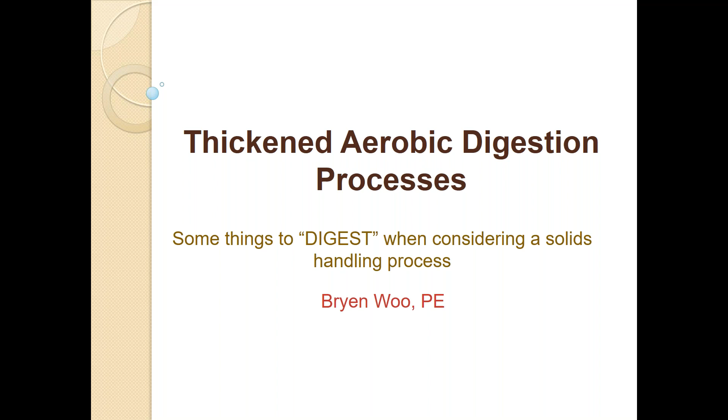So why should you really care about managing your biosolids? Why should you care about aerobic digestion? Well, the answer is that we're only growing as a society, and unless we magically forget how to go to the bathroom, we're only going to generate more wastewater.

To give you an idea here, we have about 15,000 POTWs in the US that treat about 30 billion gallons per day of wastewater. And with that, for every MGD, we produce 1 dry ton of solids. So that's a lot of solids that we're producing from our wastewater. Finding ways to manage the biosolids in the most efficient and cost-effective manner is very, very critical.

Because if you think about it, sludge treatment accounts for more than 30% of the O&M costs. Generally in the US, I think it's much higher, around 40 to 50%. And about 45% of the POTWs utilize aerobic digestion.

So I think it's important to clarify where it's ideal to use an aerobic digestion process, like what size of plant. A good guideline from our experience is that aerobic digestion is going to be utilized for plants that are 5 MGD or less. Of course, that is highly dependent on energy costs. If you have high energy costs, and I'm talking about maybe 10 cents a kilowatt hour or more, that 5 MGD might get reduced down to 4 MGD where aerobic makes sense. And if you have lower energy costs, then that 5 MGD might get stretched out to 8 MGD.

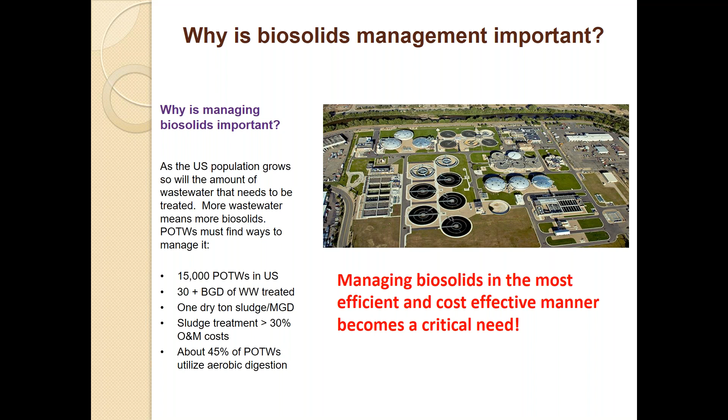So as you can see, most of the solids that are treated in the US, the majority of it is treated with aerobic digestion. So why is it important to really optimize aerobic digestion, and why treat it a little differently than just a tank full of diffusers? Because if it's not managed properly, it could be an expensive one.

And some common client concerns related to the management of biosolids, and with aerobic digestion it's no different. So you have increased solids disposal costs. If you don't stabilize the solids or have a plan to dispose of the solids, you can pay a lot in disposal costs.

One of the disadvantages about aerobic digestion is high energy costs in general. Although it is simple, you're going to spend a high amount of money on energy due to the aeration of the tanks.

Depending on what type of treatment goals you have, footprint or capacity can be a concern. One of the challenges I do like about wastewater is that limits are only going to get tighter and tighter.

I don't know if in New York, although you guys are pretty close to the Chesapeake Bay, you have some of the issues with algae growing there, so you have to control the amount of nutrients discharged to the Chesapeake Bay. There are certainly concerns with returning too much nitrogen and phosphorus back to the head of the plant, depending on what biosolids management system you have.

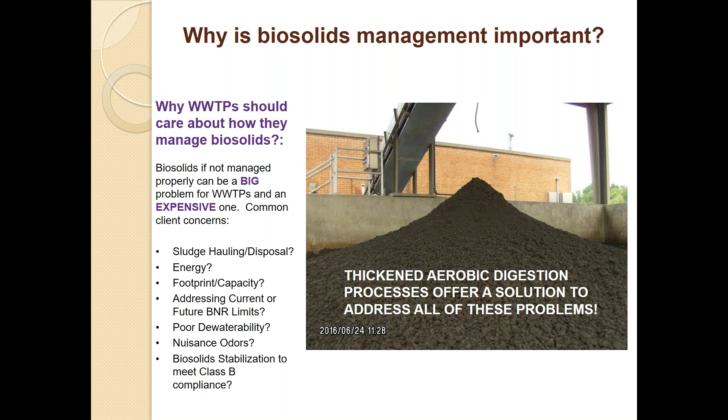So Class B stabilization, where you have a land application option, might be a very good option for clients to consider. Thickened aerobic digestion, we've really optimized the systems to offer a solution to address all of these concerns. So the first poll question of the day.

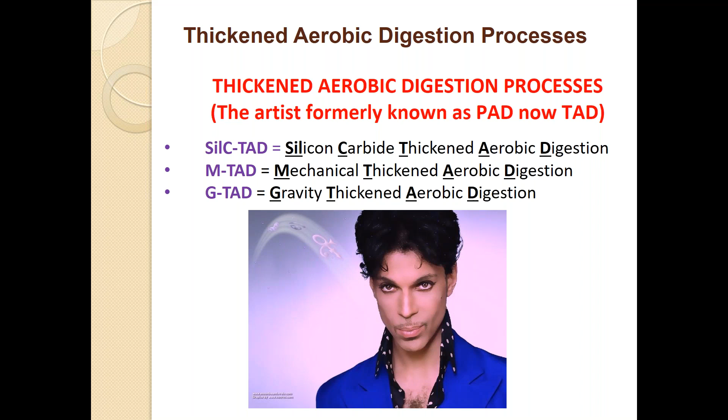So why would you want to use a TAD system, other than the process optimization techniques I described? One reason is that they feature Class B stabilization in a reduced volume. If you compare thickening versus not thickening, you're really reducing the volume and footprint required to meet Class B stabilization. For instance, if you waste your solids at 1% and thicken to say 3%, now you're talking about reducing your volume by a factor of 3 to achieve Class B stabilization.

Since you have reduced tank sizes, now you reduce your energy as well, because when you size aerobic digestion, particularly for mixing, you're sizing it based on 30 SCFM per 1,000 cubic feet just to mix the tank. So if you reduce the size and the volume of the tank, you also reduce your air requirements.

Also, these systems are ideal for retrofits. So if you have some tanks at your plant, or if your plant is up against it capacity-wise, by thickening, you increase the capacity of those tanks. So you may not need any additional infrastructure to meet Class B stabilization. And particularly for a retrofit, if you have longer digestion time, if you have longer capacity in your tanks, you get better digestion and reduced disposal costs.

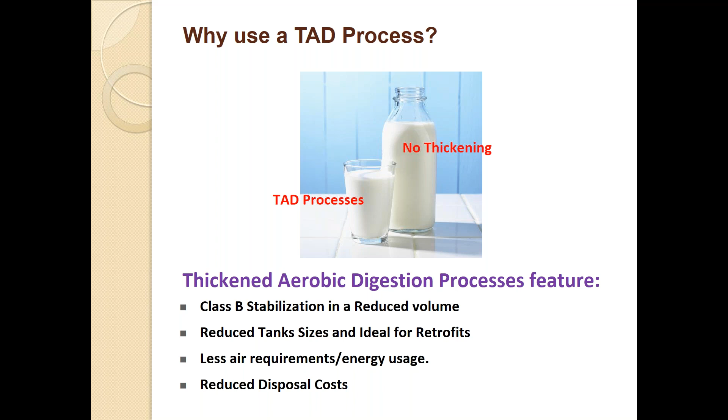I'm going to present some case studies where we have shown examples of where we've retrofitted thickening into aerobic digestion, how we've shown reduced disposal by increasing the capacity of existing tanks. So the first process is a gravity thickened aerobic digestion process, and it's very simple.

A lot of operators know how gravity thickeners work. The most that you can thicken to is 2%, and that's because you're really relying on the settling characteristics of the sludge. So if you have a good settling sludge, the more you're going to be able to thicken with a gravity thickener. But from our experience, the most that you can get thickening wise with a gravity thickener for WAS only is about 2%.

So how it works is that you have waste activated sludge go into a premix, then it goes into a gravity thickener where the sludge settles to the bottom, and then you pump the scum and the thickened sludge that's collected at the bottom of the thickener into aerobic digester number 1. So in aerobic digester number 1 you basically get a VSR and aeration, and then you loop it back with the premix tank. So you have a continuous looping cycle between the premix tank, the gravity thickener, and aerobic digester number 1.

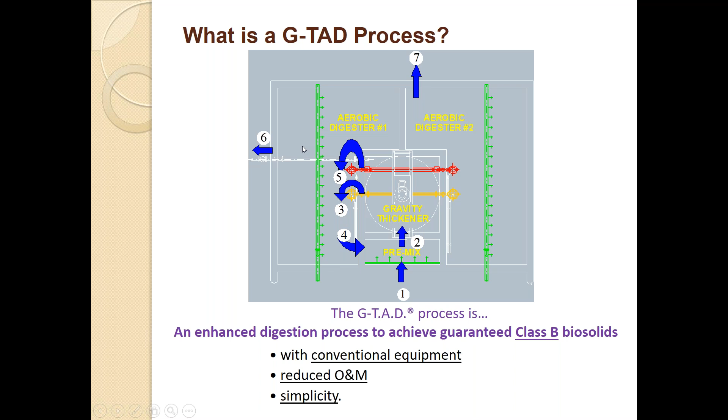Aerobic digester number 2 does not receive any incoming sludge. It's isolated from the process. So it just basically sits there and aerates. So half the time for the SRT required for Class B is how long you operate digester number 1 in loop. And after the half amount of the time is over, then you basically draw down aerobic digester number 2 and send the sludge to wherever you want to take it. Typically it's dewatering. And then aerobic digester number 2 becomes the in-loop digester. So it switches functions with aerobic digester number 1, which becomes the isolation digester. So that's how the GTAD process works.

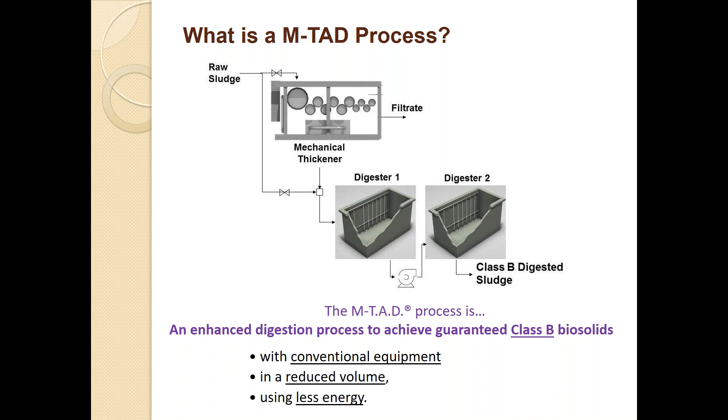The next is the mechanical thickened aerobic digestion process. And this is a very, very straightforward process. So you're using polymers to thicken the sludge up to 4%. And this is a really good application if you're looking to convert an anaerobic digester to an aerobic digester, because most anaerobic digesters have some form of mechanical thickening equipment. And then you just basically place it into multiple digesters that can operate in series or parallel. So, again, you get reduced volume, less energy, and you're using conventional equipment that operators know how to operate.

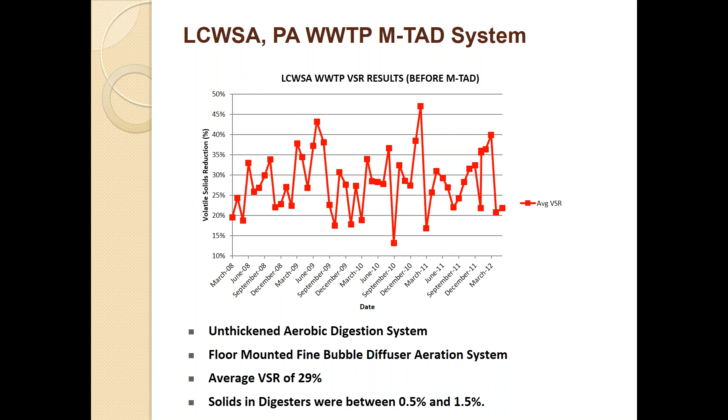So just to give you guys an idea of how the process optimization works when you employ thickening, but also implement some form of temperature control and have better aeration, let's look at a facility that has an MTAD system. So this is the Lycoming County Water and Sewer Authority in Pennsylvania. Before they implemented the MTAD system, they had a floor-mounted diffuser system, unthickened aerobic digester, and the tanks were uncovered. As you can see, they didn't really get very good VSR. On average, it was 29% over a 3-year period. And the solids in the digesters really weren't thick at all. They were only between 0.5 and 1.5%.

So with the MTAD system, we covered the aerobic digesters to improve the VSR in the winter, because in winter operation, if it gets too cold, the biological activity of the system is severely hindered, particularly when the temperatures get lower than 15 degrees C. So we covered the digesters and we thickened up to 4 to 5% with the GBT. And this gave the plant or the digesters enough capacity to get Class B stabilization.

And as you can see, you have very, very good VSR. It's generally between 40 and 70%. And we used our coarse bubble diffuser system. So it really depends on the diffuser system as well. And I'll discuss that in a little bit more detail when we get to that part of the discussion.

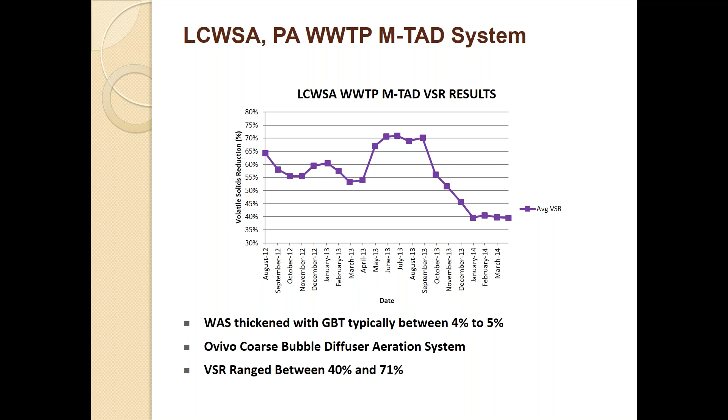But you can see that when you increase the capacity as well as improve the temperature, you get better VSR. And with better VSR, you see the differences in the solid reduction. So we fed at 5, we digested out of digester number 1 at 3%, and digester number 2, I think we got maybe an additional 0.5% solids reduction. And you see the differences in the solids reduction compared to the system prior to this.

So we were able to reduce the disposal by about 50%. And that gave them a solids disposal savings of about $37,000 a year. So you see the differences in the solids disposal when you really increase the capacity of the system, as well as provide improved digestion during the winter.

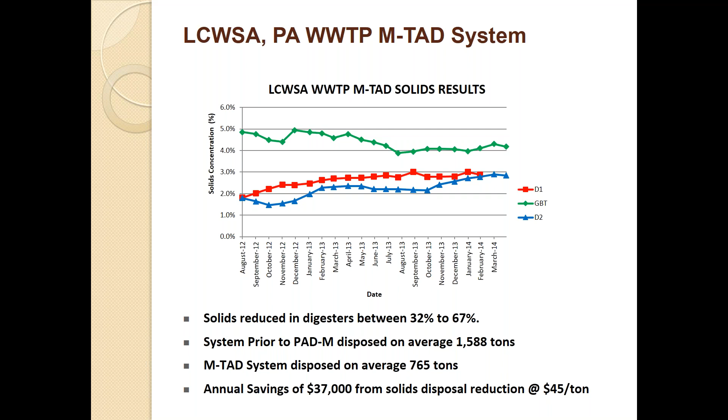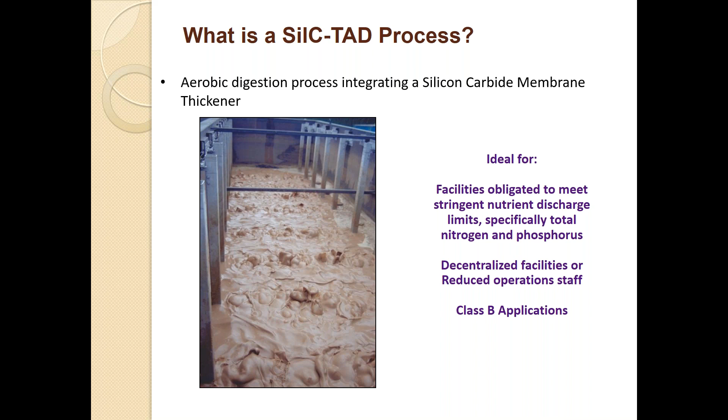So the next one might be a little bit of a new process for people. It's the SilC-TAD system, and we use a membrane thickener, silicon carbide membrane, for aerobic digestion. And the applications for this are facilities to meet stringent nitrogen and phosphorus limits. So more info on that as we progress later on in the presentations. It's ideal for decentralized facilities with reduced operator staff and Class B applications.

So before we go, oh, sorry, Wendy. No, that's okay. I will launch the second question here. Hold on.

Which of the following are reasons to use a TAD system? And you've got choices A through E, and be sure to hit submit afterwards. Looks like we've got about 75% have voted. We'll give it another few seconds. A few more votes coming in.

Okay, I'm going to close this poll. And I'm going to share the results. 93% of you picked E, and that is the correct answer. It's B, C, and D. Obviously, we're not going to get Class A stabilization. We've been talking primarily about Class B. And with that, Brian, we'll go back. Thank you, Wendy. Sure.

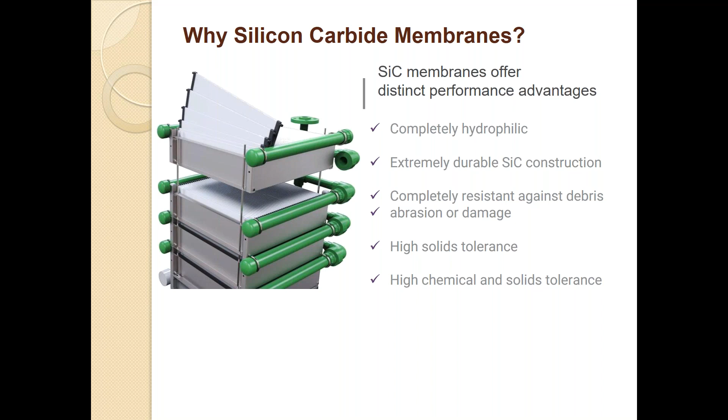With membrane thickening, probably the most important advantage is that it's extremely durable. SiC is the second hardest material on Earth. There's only one material that's harder than SiC, and for all you ladies that are engaged or married, you might be wearing this material on your finger. And the only material that has higher hardness properties than SiC is a diamond. It's completely resistant against debris or abrasion or damage related to those type of damage. It has pretty high chemical and solids tolerance as well.

So how does a membrane work? How does sludge get thickened with a membrane? So basically there's a diffuser that provides air scour for the membrane. So one of the purposes of the scouring air, or the diffuser, is to make sure that the surface of the membrane is cleaned. If you have sludge or solids that completely block the membrane plate, you're basically just taking away the functionality of the membrane. You're not going to be able to really filter any water out of the membrane. So one of the key purposes of the scourer or the diffuser is to clean the membrane.

The other is to create a vacuum in between the plates, which allows the water to be filtered out of the membranes. And that's how the sludge ultimately gets thickened. So the water that's filtered out of the membrane, it's collected through some series of pipes here.

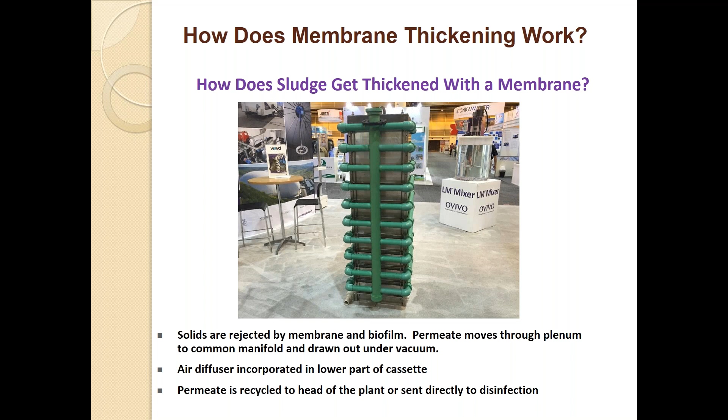And this pipe is connected to a low suction pump that extracts the water that's filtered out of the membranes. And more on this later, the water that's filtered out of the membranes is high quality, reuse quality water.

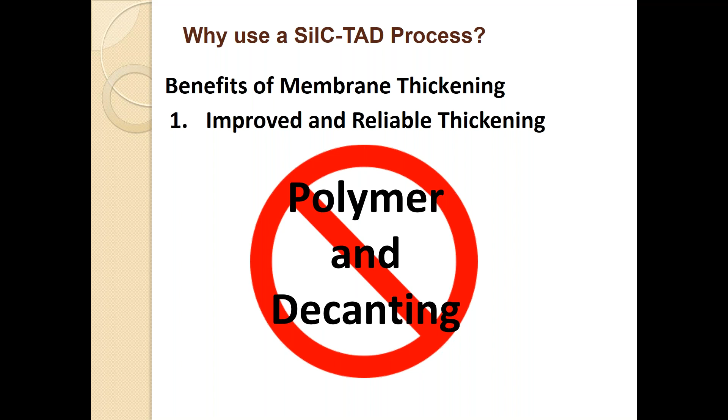So the benefits of membrane thickening is you have improved thickening. And what I mean by improved is when you decant, which is a common operation in aerobic digestion, the most from our experience that you can get is 2%. And it's inconsistent because you're relying on the settling characteristics of the sludge. With this system, you're thickening up to 3% solids, and it's very, very reliable and very consistent. The other is that you don't require any polymers to thicken. So since you don't have any polymers, you have less O&M associated to thickening.

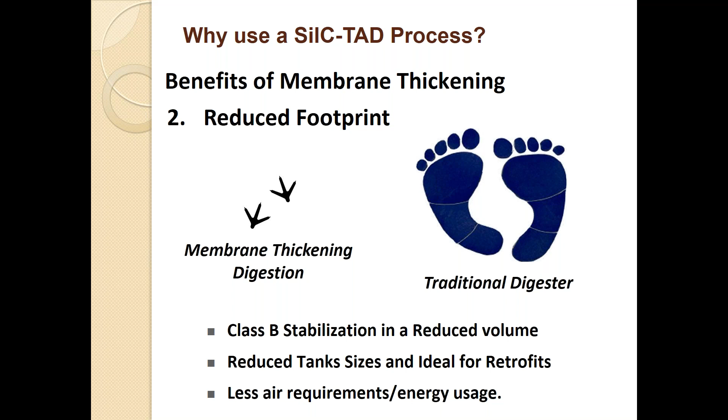So with really any of the TAD systems, the SilC-TAD is no different. You basically have reduced footprint of the membranes because you're thickening the sludge. So you get Class B stabilization in a reduced volume, reduced tank sizes, ideal for retrofits. And because of the reduced tank sizes, you have less air requirements and energy usage. And probably the most unique advantage of the membrane thickening system is it produces a high quality permeate. And the permeate is the water that's filtered out of the membranes.

And that clear glass of drinking water is the type of quality of water that you expect to be filtered out of the membranes. So when we talk about why this system is ideal for BNR applications, the reason is because this water contains very low amounts of nitrogen and phosphorus. And because it's reuse quality and because it has very low amounts of nitrogen and phosphorus, it gives you some options and some operational flexibility.

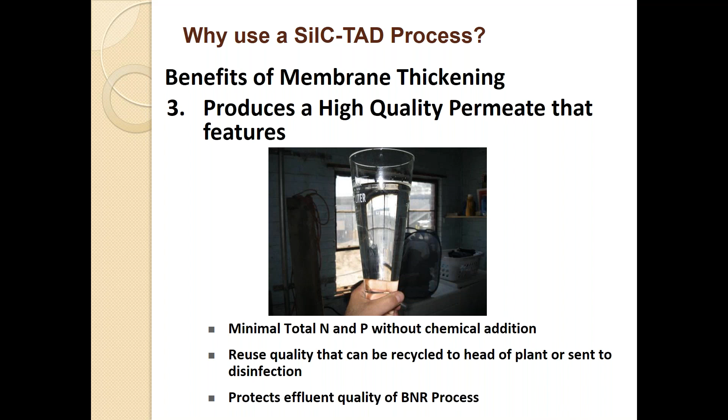So first is that certainly you can take it to the front of the plant for sure, but you can also combine it with your effluent, because we learned in engineering school the key to pollution, the solution to pollution is dilution. And you also can consider sending this to disinfection as well. And keep in mind that the treatment and the very low nitrogen and phosphorus in the permeate, it's all managed biologically. There's no chemical addition required. It's also an economical solution if you're evaluating it over the life of a wastewater treatment plant.

So let's take the Fruitland wastewater treatment plant as an example. So some background on the Fruitland wastewater treatment plant is that it was a 0.8 MGD SBR. They were upgrading the SBR to do ENR, enhanced nutrient removal. And they had 2 conventional aerobic digesters. And these digesters did not provide enough capacity for Class B stabilization. So the consulting engineer for this facility had to consider some thickening alternatives to optimize and make best use of the existing infrastructure. So they were considering gravity thickening, mechanical thickening, and membrane thickening aerobic digestion.

So what I find very interesting about this evaluation is not that the membrane thickening process had the highest capital costs, but really how even it is. It's not much more expensive than mechanical or gravity thickened aerobic digestion. So why is that? The reason why is because the mechanical thickener required a building, and buildings can be very expensive to house a mechanical thickener. With gravity thickening, because you're only able to thicken to 2%, they had to build an additional digester to achieve Class B, whereas membrane thickening required the least amount of infrastructure, just an anoxic basin and a membrane thickening basin.

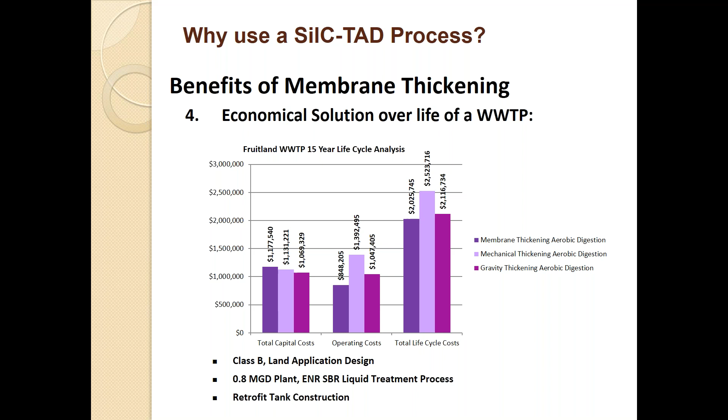The reason why we screen it is to protect the integrity of the membranes. So the WAS goes into an anoxic basin, mixed with a submersible mixer. Then it goes into a membrane thickening basin where the permeate goes to wherever you want to take it, and the thickened solids get left in the membrane thickening basin.

It overflows into the in-loop digester, where you get the majority of all the solids reduction, but also the nitrification to occur. Then it overflows back to the anoxic basin. So you get a continuous looping cycle between the anoxic basin, the membrane thickening basin, and the in-loop digester.

This looping cycle is the key to why we're able to have very low nitrogen and phosphorus in the water that's filtered out of the membranes. First, you have nitrified sludge going into the anoxic basin, so you get full nitrification-denitrification, and then your carbon source comes from your WAS, so you get the denitrification. That's how we're able to get total nitrogen removal. The phosphorus is managed because the membrane thickening basin is continuously aerated.

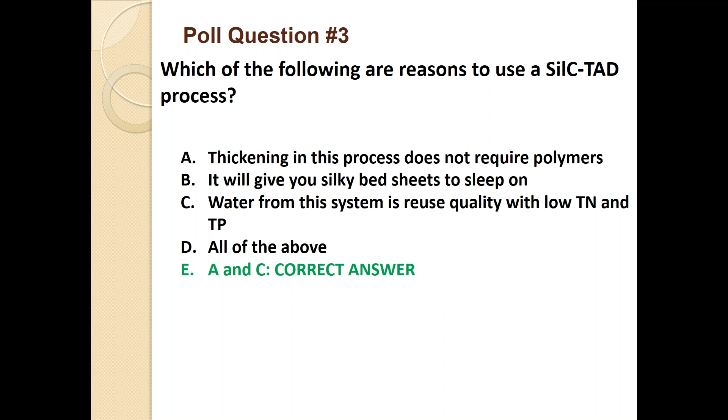So with thickened aerobic digestion, obviously I discussed a lot of the great advantages to thickening. However, there could be challenges if all the challenges with thickening are not considered. One of the key challenges is that you have to have the right aeration system for a thickened aerobic digestion process. You cannot just put in a fine bubble diffuser, because if you do, you can have quite a few challenges if you don't have the correct aeration system.

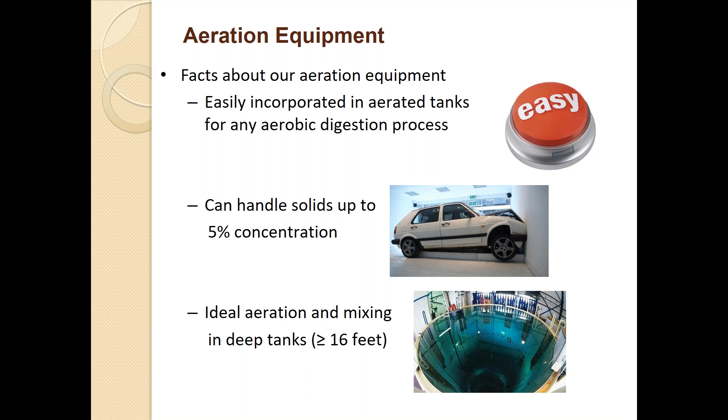Some of the challenges could be: you could clog the diffusers, you won't get good mixing in your digester, and you'll have a lack of oxygen transfer efficiency. If you don't get the right OTE, the performance of your process may be hindered. So obviously you need the right aeration equipment with an aerobic digestion system. We have a lot of experience with thickened aerobic digestion, and I think a lot of it has to do with the fact that we have the perfect diffuser for a thickened aerobic digestion application - the single drop diffuser.

If you had a cup of water and you put a straw in it, raised it about 1 millimeter off the bottom of the cup, and blew air into it, that's basically how the diffuser works.

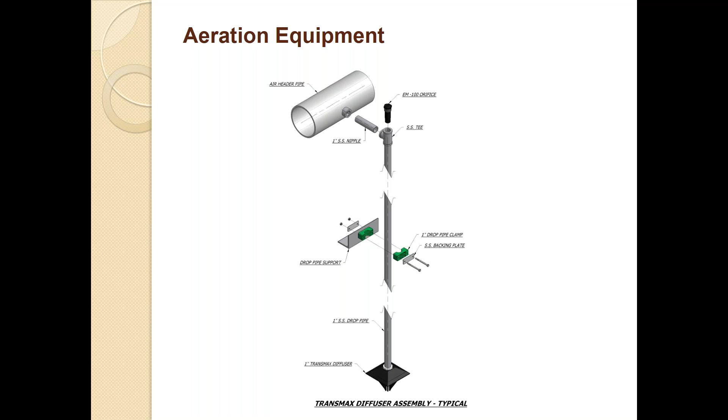One of the key advantages of this diffuser is that the orifice is completely accessible. It's not submerged in the liquid level, and the orifice is the only part of the diffuser that requires access in order to maintain it.

The diffuser alone is mainly a non-clog diffuser, but in the rare event that it does clog, all you have to do is unscrew the orifice cap shown in the picture on the right, stick a rod or pressure hose down the drop pipe, and get the clog out. It's like cleaning a gun for some of you gun enthusiasts out there.

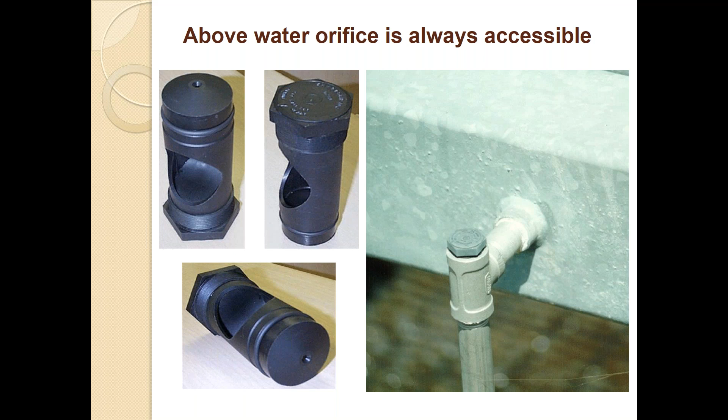One advantage is that because you can access the orifice, you don't have to drain the tanks or take them out of service. With a floor mounted diffuser system, if it clogs, the operator has to go into the tank, drain it, and clean the diffusers. Obviously it's not a fun chore, and this design completely eliminates having to do that.

The single drop diffuser alone can aerate solids up to 3%, but if you wanted to mix very thick solids, you would add either a shear tube or a draft tube to the single drop diffuser.

Both function basically as an airlift pump. You're pumping sludge from the bottom of the basin up to the top of the tube, getting this airlift pumping action, which increases the velocity of the mixing. That's how you're able to mix very high solids.

The shear tube is a single tube that goes around one single drop diffuser, whereas a draft tube is a bigger tube with multiple diffusers inside of it.

Also, one advantage is that the diffuser discharge point is actually halfway into the tube, so it's not submerged all the way down to the bottom of the floor. That reduces the discharge pressure requirement for your blower system.

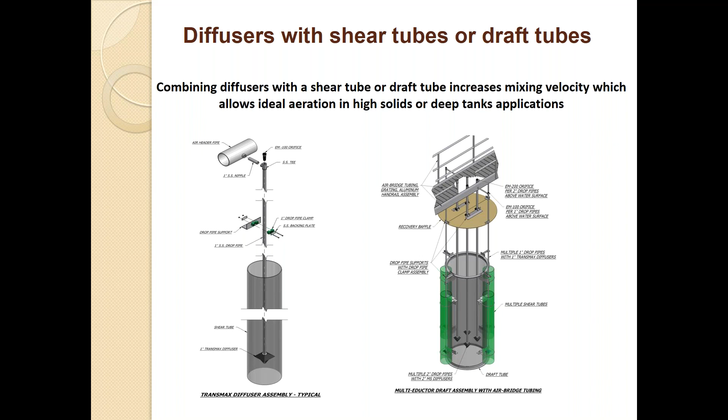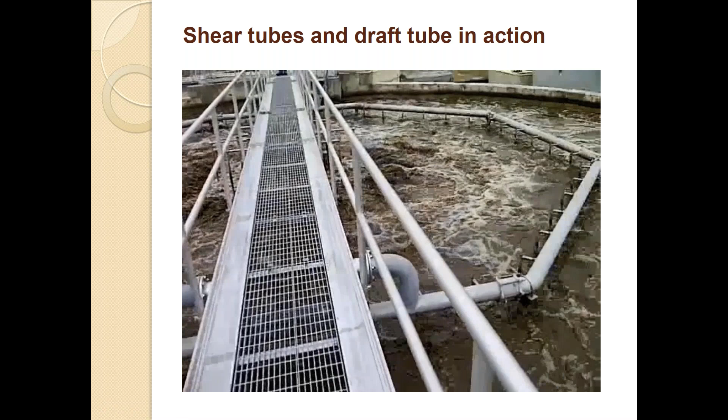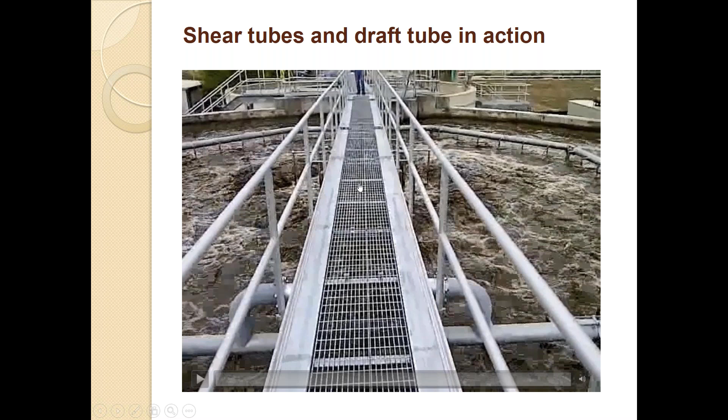This is what the aeration of the system looks like. The center portion of the tank is being mixed with a multi-eductor draft tube, and the outside of the tank is being mixed with the shear tube aeration. As you can see, you get very powerful mixing with this diffuser system.

We also have an option where we integrate a flat panel aluminum cover. As we know, temperature control matters, particularly when it's cold, and it does get cold in most of the part where most people in this audience are from, which is the East Coast. The cover really optimizes VSR in the wintertime.

Not only do you have issues with lack of VSR if the temperature gets too cold, but you also have ammonia accumulation that can occur because nitrifying bacteria activity is severely hindered when the temperature is below 15 degrees C. This cover system really provides a good solution to manage the temperature when it gets too cold.

The cover system, we call it an air beam cover, uses the support beams as air channels to provide air to the single drop diffuser system. We integrate all the diffuser systems I just showed you, whether it be the single drop, the draft tube, or the shear tubes, with this cover system.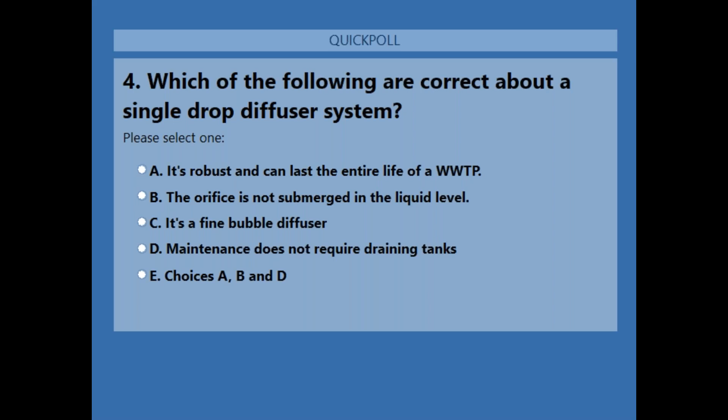Looks like we have some pretty quick voting by the majority of you. Must be an easy question. We'll give it a few more seconds. Okay, it looks like the majority of you have voted, and the right answer is, sorry, I'll share that. E, choices A, B, and D, and 91% of you got that right, so good job.

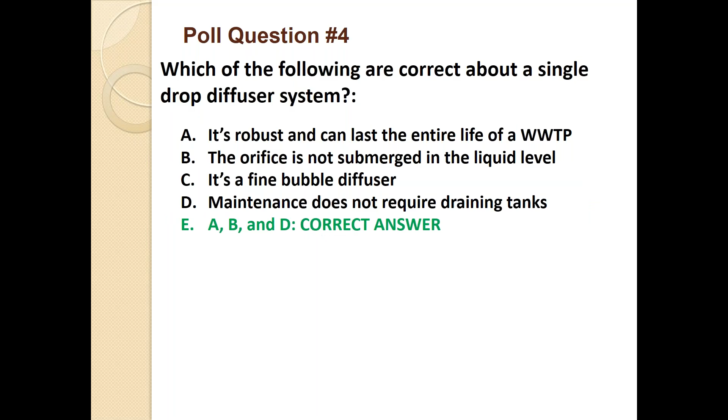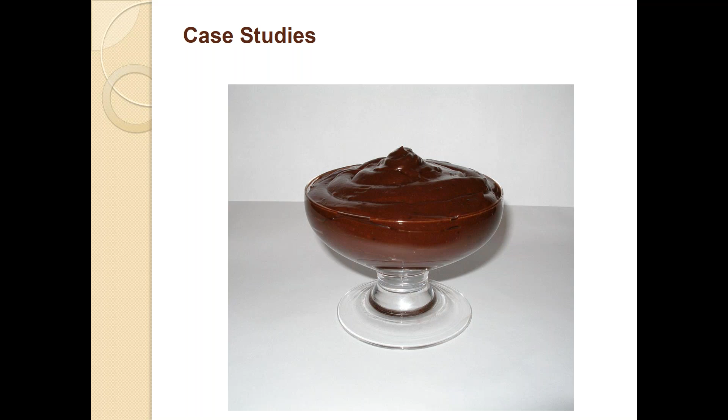So now we move into case studies where we've collected data from several facilities that operate the diffuser system along with the TAD process. So they say the proof is in the pudding, and I find it ironic I talk about sludge and it looks a little bit like pudding. So the first one I want to talk about is Frackville, Pennsylvania.

With Frackville, they had aerobic digesters that were not covered, and their belt press was pretty close to capacity. So the operators felt that the solution was to increase the size of the belt press to handle or dewater their solids. But the engineer had an idea with their experience with Ovivo's aerobic digestion systems. The belt press was a good piece of equipment still. It was in good shape.

Maybe there was another way to optimize their solids process besides increasing the size of their belt press or getting a new belt press. One of the ideas they had is, okay, you have these open top covers, you stabilize the sludge by adding lime. So maybe we can get rid of having to add the lime and provide improved digestion and send less solids to the press. And by sending less solids to the press to process, maybe that would prevent the plant from having to buy another belt press. So that's the direction that the engineer went with: they invested the money on improving the digestion instead of buying a new belt press.

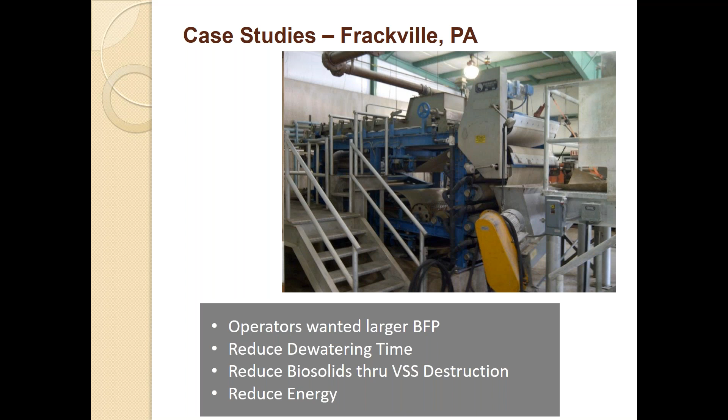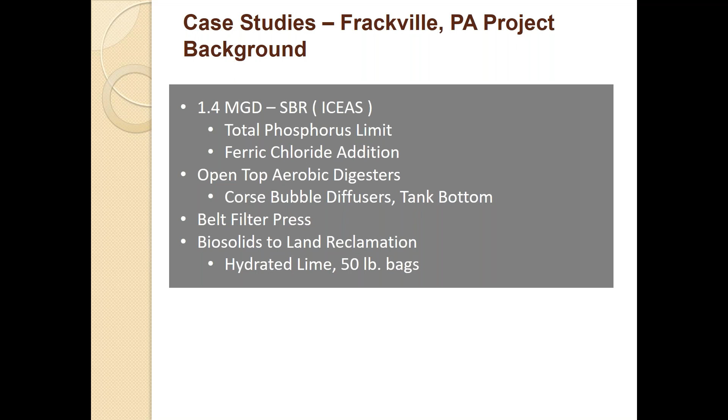And some history on this is that, again, their aerobic digesters were not covered. They had floor-mounted coarse bubble diffusers. They added lime to stabilize because they weren't getting the VSR required to meet Class B. And they were also adding ferric to control the phosphorus. Now, we didn't implement any type of thickening. What we did is that we added the air beam covers to improve the temperature and hence improve the volatile solids reduction. And that's basically what we did here.

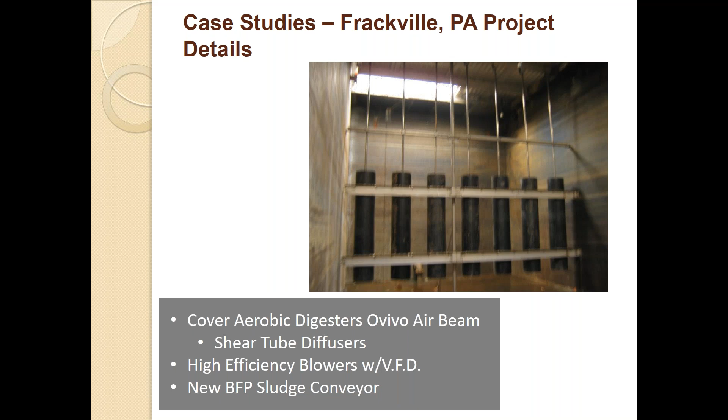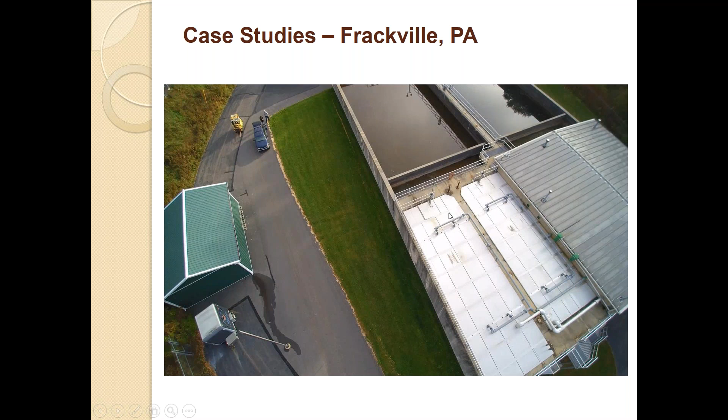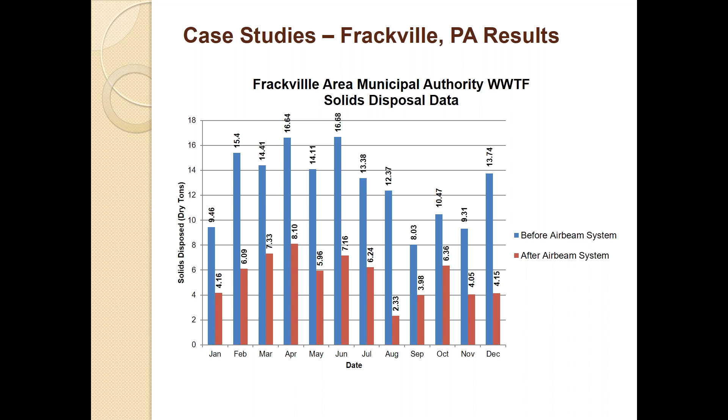So we have the cover and the single drop diffusers with shear tubes to improve the temperature and the VSR. And this is what you see here. This is what the covers look like at Frackville. And then you see the SBR tanks. And then this is what we meant by the goal of the system to reduce the solids being sent to the belt press. You can see before the air beam system and comparing it after the air beam system was implemented, the amount of solids that were reduced as a result of improving the digestion by just simply covering the tank and providing a better diffuser system.

They realized some savings, a 57% reduction in solids. That was only about a $17,000 annual savings. They were able to get an energy rebate from Pennsylvania Power and Light, which is their energy provider, and they showed a substantial amount of energy savings as a result of using our system. Remember, with the shear tube system, the diffusers are not submerged to the bottom of the floor, and that reduced the operating horsepower on their blowers.

Other benefits were that they didn't need any lime for land application. We were able to get a Class B stabilized product. And because of the improved digestion and implementing aerobic and anaerobic cycling, they were able to minimize the amount of P going back to the head of the plant. So they eliminated adding ferric for P removal.

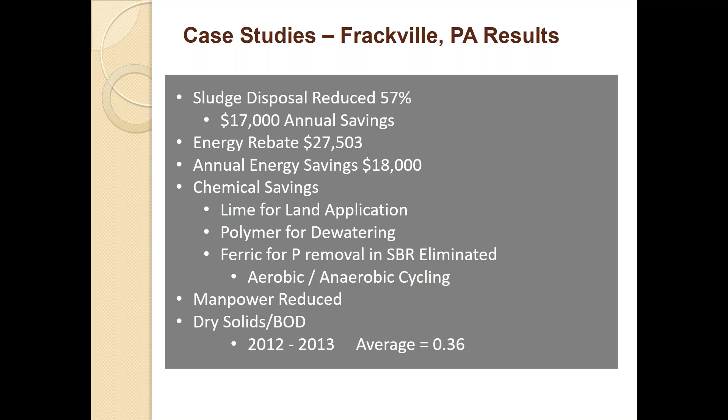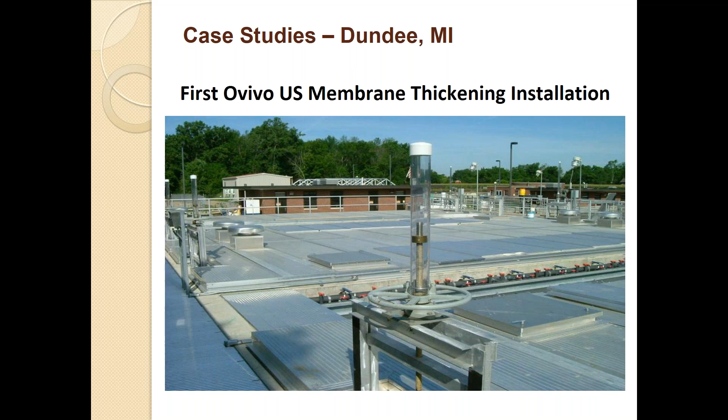So now we'll go into the membrane thickening, and the first one I want to talk about is Dundee, Michigan, which was the very first US installation. Some history on this is that the way they dispose of their solids at this facility is they land apply it, and they subsurface inject it. If you have too much snow on the ground, it could be very challenging to subsurface inject the solids onto the ground. So they basically had to limit their solids disposal to 2 times per year, once before the snow hit and once after the snow hits.

What happened before is they had a conventional aerobic digester. They only thickened to 2%, and they only got 120 days of SRT. They needed 180 days of SRT, again, to limit the times that they disposed the solids. And all Ovivo did was add in the membrane thickening basin, thickened to 3%, and they were able to get the required holding time so that they only dispose the solids twice per year.

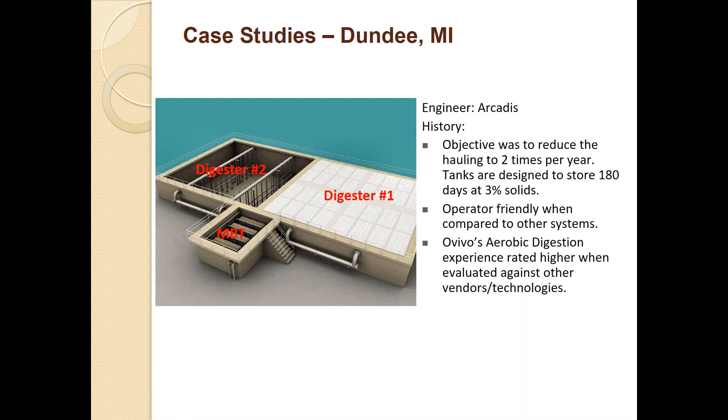And I mentioned one of the advantages of the membrane thickening system is that you get very good water quality that's filtered out of the membranes. And you can see here that you basically have non-detects on both the ammonia and nitrates, and the phosphorus is just a little over 1. And that was 1.5 years worth of data.

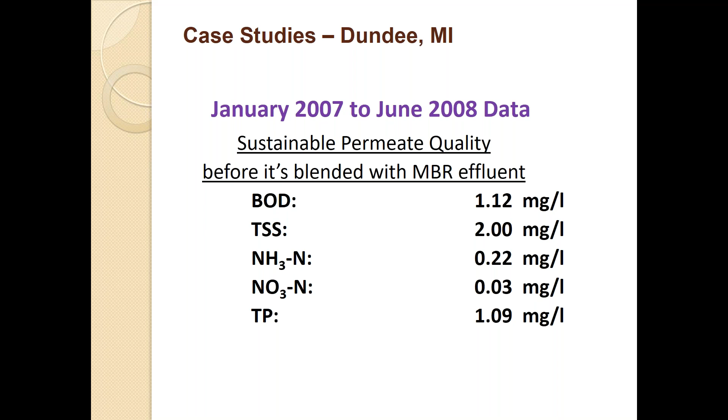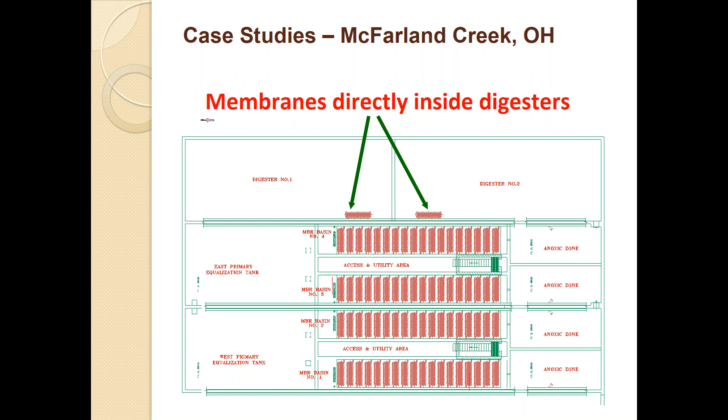The next one that I want to talk about is McFarland Creek, and this is a 2-stage membrane thickening system. What's unique about this is that we put the membranes directly inside of the digesters and we thicken it in 2 stages. The first one we thicken to about 2%, and that's to optimize the flux rate and reduce the capital costs of the equipment. And then in digester number 2, we thicken it to about 4%, where we used a more derated flux rate. And again, this was a retrofit.

And what I wanted to show here is that, again, by increasing the capacity of the tanks through thickening and improving the digestion, what kind of impacts it has on your dewatering system. Without the membrane thickening, they were operating the belt press about 57% more than when they implemented membrane thickening, and that is because they sent substantially less solids to the press to process. And you see the reduction in the amount of solids that were produced by the plant as a result of improved digestion. You got a 41% reduction of solids disposed, and then you had reductions in polymer because there was less solids to dewater. And you can see all these had cost savings in terms of solids disposal and polymer cost.

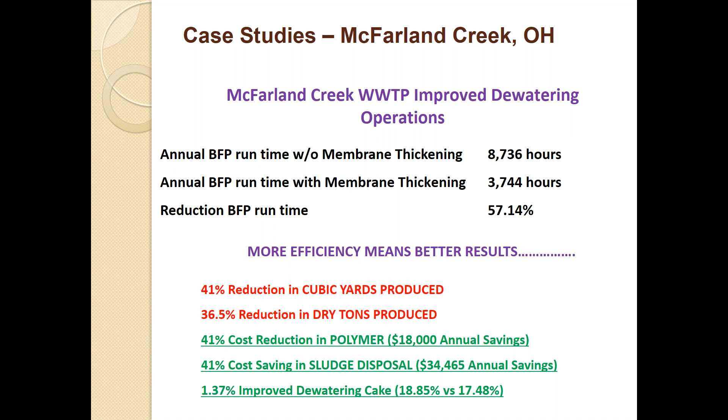And then maybe closer to home, there we have a membrane thickening system. It doesn't focus on stabilization, but it focuses on thickening. So at Woodside, they transport the sludge in liquid form to another facility to be processed. And they actually pay a pretty penny to do that. I think they pay about 10 cents a gallon to haul their solids to another facility to process. And by thickening it to 3%, we were able to reduce the number of hauling trips, the number of trucks, because basically you're removing the amount of water and you're disposing more solids. And as a result of that, you see substantial savings and a very, very quick payback.

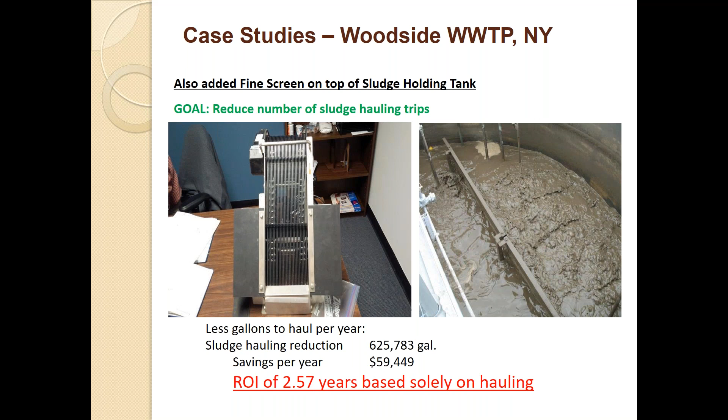So next poll question, Wendy. Okay, this is our last poll question. Number 5, which of the following was not a benefit from having an improved digestion process at the Frackville, Pennsylvania facility? Please select one.

This looks like another easy question. We see a lot of responses. Good to see you're paying attention. Couple more seconds. All right, I think the majority of you have voted, and I'll close that and share with you the answer. Obviously, the answer was B, operators got free beers from a local bar. That is what was not a benefit, although we don't know if that was the case. So with that, Brian. Of course, Wendy, they might have celebrated with some of the benefits that we provided them, right? Yeah.